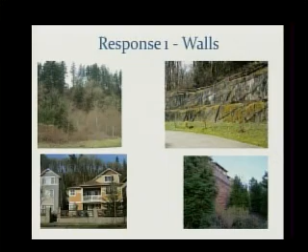And this is a cross-section taken from a very similar spot on Shangri-La Way looking up towards Parcel 7. This is a one-to-one perspective, basically, so 1 foot horizontally is 1 foot vertically. You can see how much topographic relief there is from Parcel 6 to Parcel 7. This is the approximate wall height that's proposed, with the intervening vegetation, and you can start to get the sense that the amount of visibility of that wall face is going to be pretty minimal.

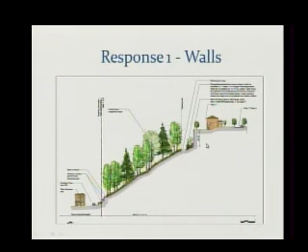So before I close this up on walls, we did hear some concerns about ownership and maintenance of the wall. In response, we have revised condition number 8. It's a long one—I'll read it, since we don't have to read the whole lot of them like in the first meeting.

Where it is not practical to terrace walls, long and/or tall walls will be articulated to add visual interest to the community, and use landscape to soften the wall and transition the scale of the wall where pedestrians are nearby. For instance, at the base of the eastern wall in Parcel 7, landscaping, which includes the use of coniferous trees where feasible, shall be placed between the base of the wall and the trail in order to reduce the wall's scale and presence to pedestrians.

And then this is the part we added in response to the HOA ownership and maintenance questions. In addition, walls must be: 1, owned and maintained by the Talus Homeowners Association, an election by the Homeowners Association; or 2, owned and maintained by a sub-HOA that meets the city standards for financial viability; or 3, by another group or organization with the ability to access and assess individual lots for the protection, preservation, and eventual replacement of the walls. Consideration must be given to and demonstrated on the wall design plans that a method for the eventual replacement of the walls is accommodated in the wall design and the available property above and below the wall. This will be enforced during the wall permits with the landscape permit.

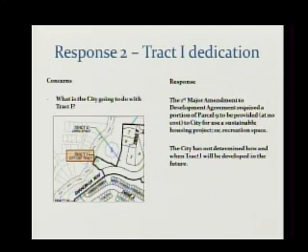I was involved in the major amendment when we did that. I think what it amounted to was that at the time Z-Home was in its inception, going into a construction phase, and it was a popular idea being fostered within the city and within Issaquah Highlands. It kind of got put in there as an option from the city's perspective, to be able to look at doing that. It certainly wasn't from the master developer's perspective — it was more that, depending on how successful that was in the Highlands, this might be an opportunity to do something similar.

And there was also a tradition, before Z-Home, of one or two idea houses at Issaquah Highlands. So I understand your question about whether that would be a place you'd want to attract visitors as a kind of idea house. On the other hand, I guess the city does see value in demonstration projects, and needs places to do that if they choose to.

I know this isn't going to change the decision, but just my two cents — it kind of feels like we're putting in what appears to be a sustainable house to make us feel better about cutting down 15 acres of trees. That's kind of how I see this. My whole neighborhood greenbelt got wiped out this week, so I'm a little sensitive.

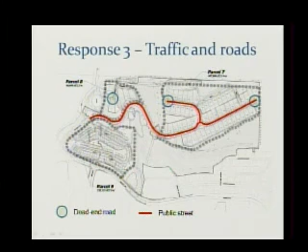Number 4 had a question about sidewalk removal from one of the Talus residents, and I think there was a little bit of confusion. I think the person might have thought we were talking about removing existing sidewalks in the project, and that's not the case.

What we have approved in a few select locations is a removal of what would be newly constructed sidewalks on one half of the street. We've done this to limit grading in certain locations, or where there's no homes on the other side or no direct recreation opportunities or things like that. So the pedestrian connectivity isn't really interrupted - in some places, there will just be one sidewalk instead of 2 on both sides of the street.

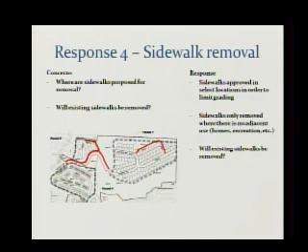Tracts and open spaces. Concerns we have: who will own and maintain the tracts within this plat? Again, that would be the Talus Homeowners Association, assuming they accept them. And again, that process happens through the final plat.

What is being done about invasive plant species? I'll talk a little bit about some new and revised conditions that we've added to address that, as well as the logged areas.

Speaking to the logged areas, everything that's been previously logged will be revegetated. To get to that, I've added here new condition 27: any previously cleared land shall be replanted with native, non-invasive trees and plants prior to the acceptance of open space and recreation tracts by the Talus Homeowners Association.

Additionally, the applicant must prepare a plan for the removal and prevention of established invasive plant species within the open space areas. The city must approve the plan, and it must be implemented prior to the acceptance of any open space and recreation tracts. And there's one slight amendment.

The red where it says 'and prevention' was an add-in based on a comment we received that looks at not only removing the invasives but addressing that issue over time. That's something that we'll look at in the plan that is prepared. So thank you, David, for that comment.

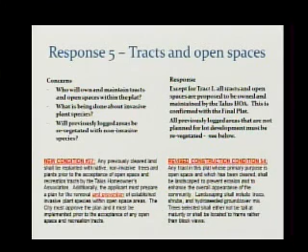Any others? Recreation areas - what is the usable flat area of Tract O? That was one of the questions. Triad ran the numbers, and the ballpark is about 3,250 square feet. I think, yeah, they said that's about 130 feet long by 20 to 30 feet wide, so that should be a fairly usable space. Again, just for reference, I added this little map - the Tract O, that's actually, oh, this one's Tract O, right there at the end of the wall.

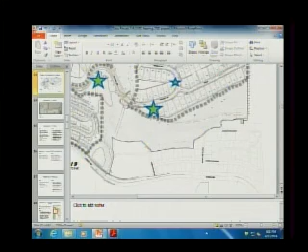What recreation elements will be provided within the various spaces? That's a little bit outside the purview of a plat. We look at it to make sure that the feel of it, the general sense, that the space provided will allow a variety of uses that fit in with the community. But as to specific elements, we're not necessarily looking at that. If the applicant would like to talk about what they plan to do, we can certainly listen.

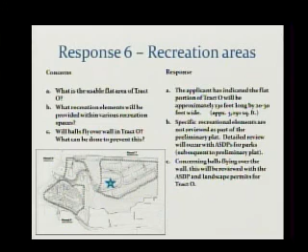A third concern we had was balls flying over the wall. Great, it was a great concern, and a little bit outside of the purview, but it's definitely something that we'll take into consideration with the construction permits. Look for solutions there. Do you want to add anything?

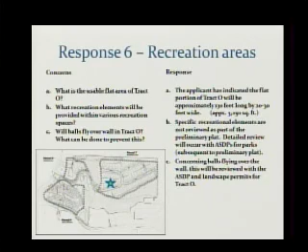Regarding the amenities, for some of the more active spaces that are proposed with this plat, we kind of walked you guys through some of the ideas a couple weeks ago, and then that information was handed out again, so I don't want to go through that again. It was fun, but if anybody has any other questions or thoughts or ideas, I'd be more than happy to respond to those.

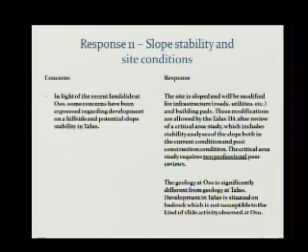If not, if we have other questions, concerns. Okay, we got it covered. Thank you. Oops, wrong way.

Two more: phasing of the project. Ryan, let me know if I'm missing anything here, but we had a question about how long this thing's going to take and what the process would be.

So in the event that the preliminary plat gets approved by the city council, well, first let me take a step back. Site construction, let me take another step back. All of this timing is assuming that things get approved, that the Commission recommends approval to the council, and without too much delay, council approves the preliminary plat.

Assuming those things happen, they've indicated that site construction would start in 2014 or early 2015. A final plat would come forward at the end of this year, and that'll probably go over the turn of the year. Home construction early to mid 2015, and then assuming favorable market conditions, they've indicated that they could have this thing wrapped up as early as 2017.

We know how the markets can be, and certainly I don't think any of that's set in stone, but is that pretty accurate with what you guys think?

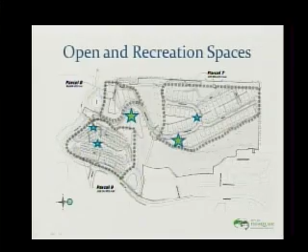I have a clarification question, please. Are the tanks the only things that are impinging on this buffer in this entire design? And the access to them. So, can you see all right? So the road, right now the existing road is this one that comes to a pair of tanks. There's this road and a pair of tanks. This slide doesn't show very well.

There's some terraced walls here and a rockery, yes, a rockery here. The applicant has indicated that it is likely that they could eliminate those walls. I think from the city's perspective, the reason the terraced walls were not a concern was that the requirement was that landscaping such as trees be provided between those walls to revegetate that area.

So if you mentioned that the applicant has mentioned that maybe we can do away with those walls, if those walls aren't there, then there is nothing else that's infringing on that 50-foot buffer? They are not proposing to remove the tanks or the access road. Right, everything would be as is.

So there are already these existing tanks, and the only other thing that's proposed to be in the 50-foot buffer is another pair of tanks, the new reservoir. Right, okay. I just wanted to clarify, sometimes it's confusing and you think there's only one pair, but there would be two. Okay.

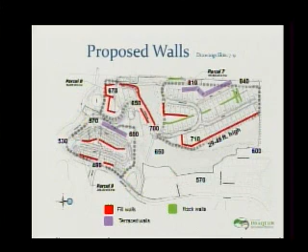I can't give you a specific number of what this particular, the big wall is of that. And that includes installation of the wall, the grid, everything associated with that. Replacement typically of particularly this wall, this is what we call a faced wall on an MSE, and so the grid in that really stays in place, and you're able to come in and basically reface that without going back into the earth portion of that. Certainly you're going to have access issues you're going to have to deal with, but maybe a total replacement cost is not what you're looking at.

So I'm assuming some percentage, you know. So I'm assuming that $2.5 million does not include engineering, though. No, that's just direct construction costs.

Are you, Jim? Did you get your question answered? Okay, Eric. Yeah, I just want to clarify, Lucy. You explained that this whole... I appreciate your explanation, and I think for the public that's a good understanding and clarification. But for the commission, that doesn't fall under our purview as far as the whole HOA issue and responsibilities and so forth. Is that correct?

Eric, I think what you're hitting on is the question of, for instance, whether the cost of the walls can be a consideration. I think that's a pretty challenge. I mean, I think we would be challenged to find... your microphone.